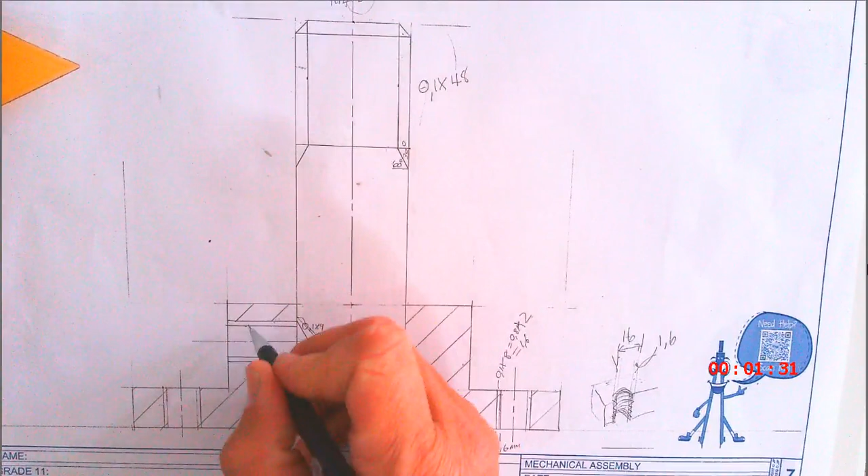This one, what was this one? Hy was M9, so this is M18. So this is going to be 1.8. And that one will also be 1.8 millimeters. Onthou julle, alles moet met 2 gemaal word, because we draw scale 2 to 1. So all the measurements have to be multiplied by 2. This is why the M24 is M48.

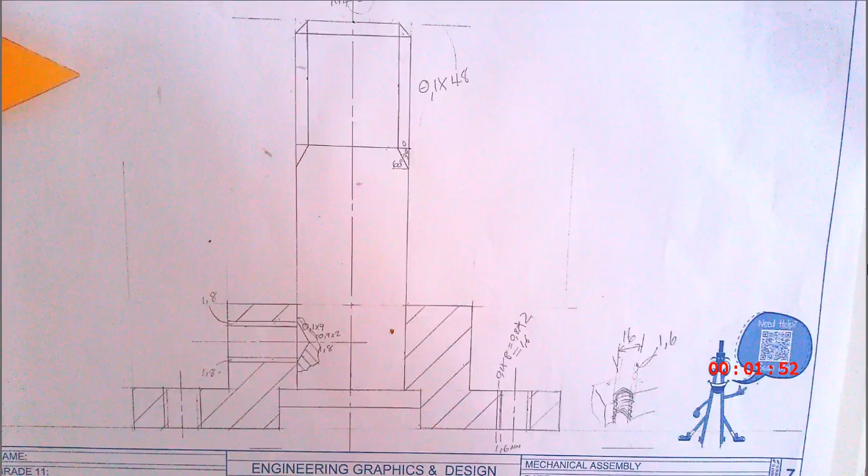There's a pulley, a washer, a nut, and a bush. Okay, now let's quickly talk about the bush. If you guys are going to be drawing the bush, 3-dimensional, it would look like this when you cut through it.

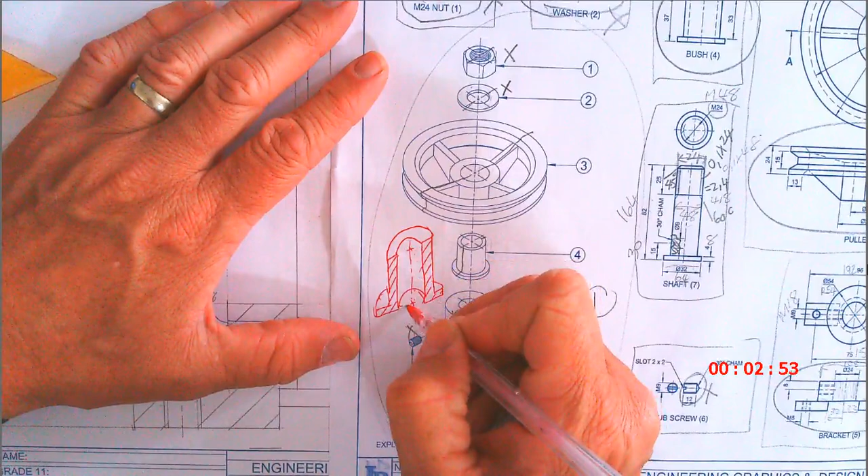So if you are looking from this side, what are you going to see? Kom ons kyk gou hierso. You guys look at this one. So I'm going to teach you how to do this. So if you cut through this thing, you're going to keep the outline. So it's going to look like this. Draw the outline, and the hidden lines there and there will become solid. You will hatch this part, you'll hatch that part, you will have a center line in the middle.

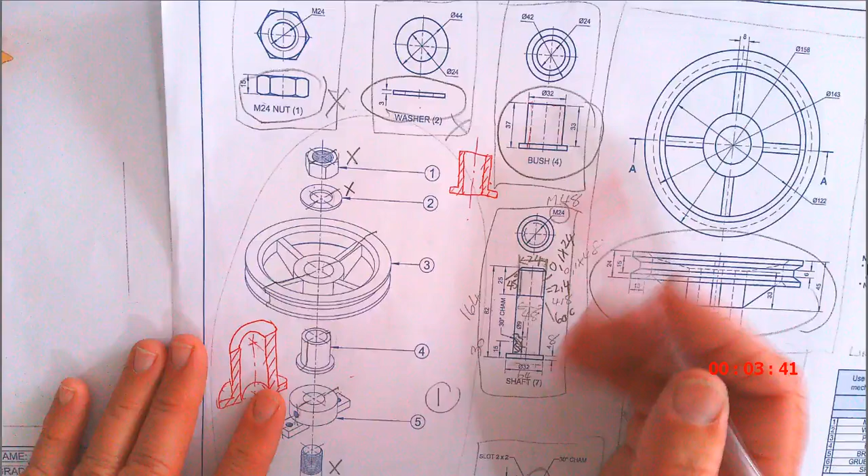Do you see this? It's the same thing. There's the gap in the middle, there's the one side, there's the other side. Okay, so a principle you can apply is keep the outline, hidden lines become solid lines. Okay, so daai bussie gaan ek volgende hier insit.

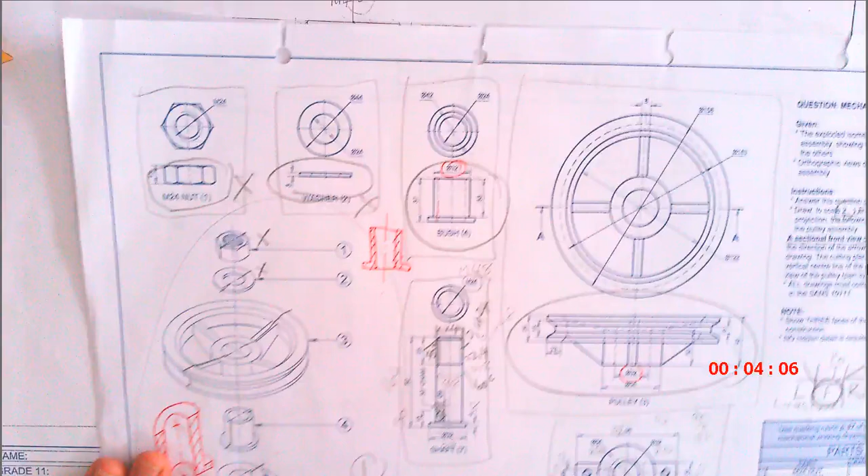If I have a look, I'll see that the measurement of that thing is 32 millimeters there, diameter 32, and if I have a look at the hole in the pulley, you will see the same measurement. Okay, so that diameter 32, that's the same size. We will see this is 45. So basically we're going to draw the pulley plus the bush, en daai randjie gaan daar uitstaan.

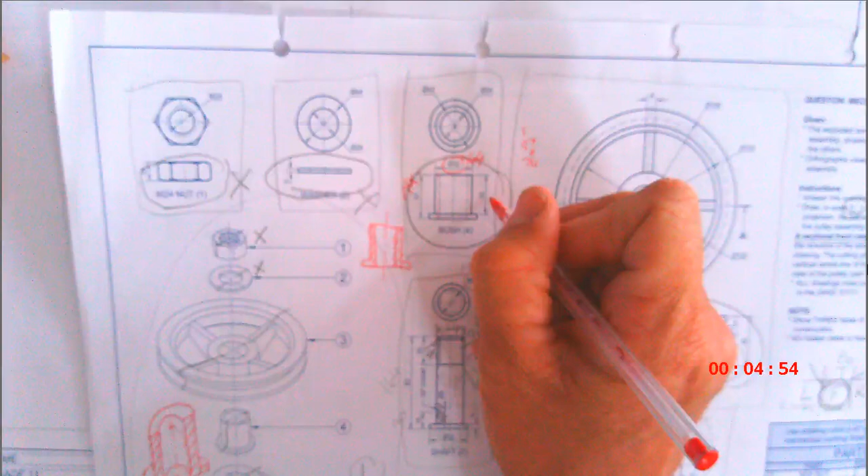Okay, so the next thing I'm going to draw quickly with you guys is the bush. The 37 will become 60 plus 14, so that's 74, is ek reg? 37 maal 2, 2 maal 7 is 14, 2 maal 3 is 6, so this is going to be 74, that is going to be 64, this is going to be 66, and that's going to be diameter 48, and this one is going to be diameter 84.

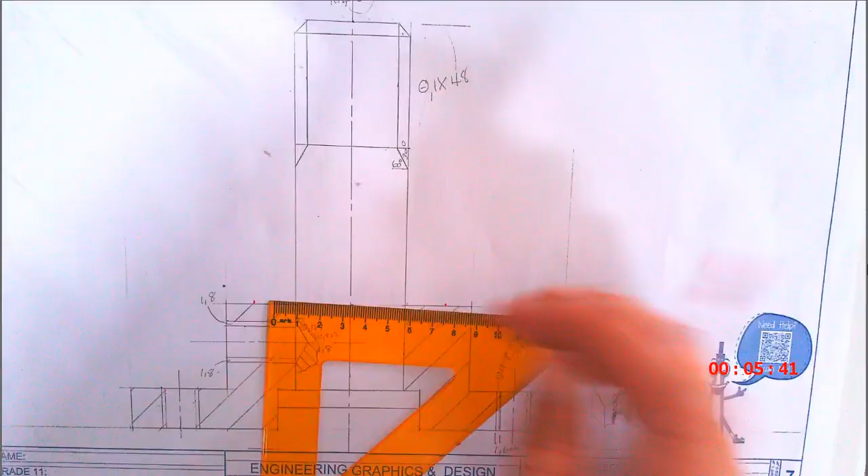So I'm going to start here with the 82 here at the bottom. So this one is going to be 82. So I'm going to use a different color now. I'm just going to draw in pen. Don't draw in pen, please. This is just to help you. 42. Then let's see what its height is. To find out the height, this is 33 and 37, 4 millimeters difference. So that space is going to be double that. That's going to be 8. That space there. Okay, so it's going to be 8 millimeters.

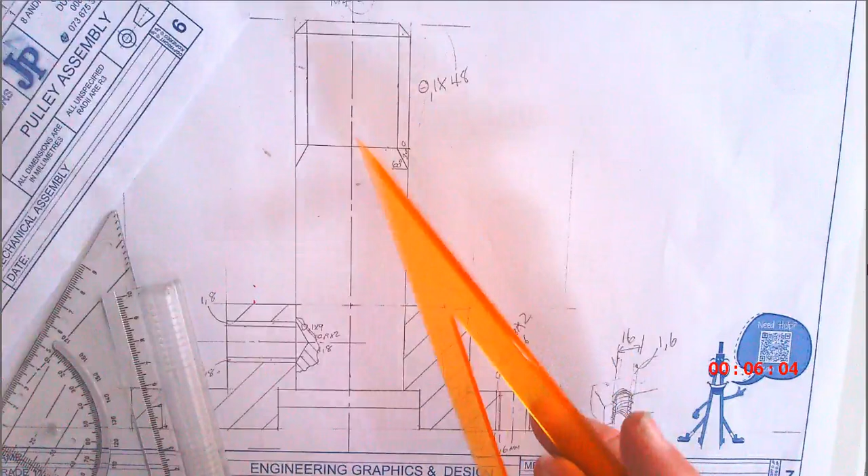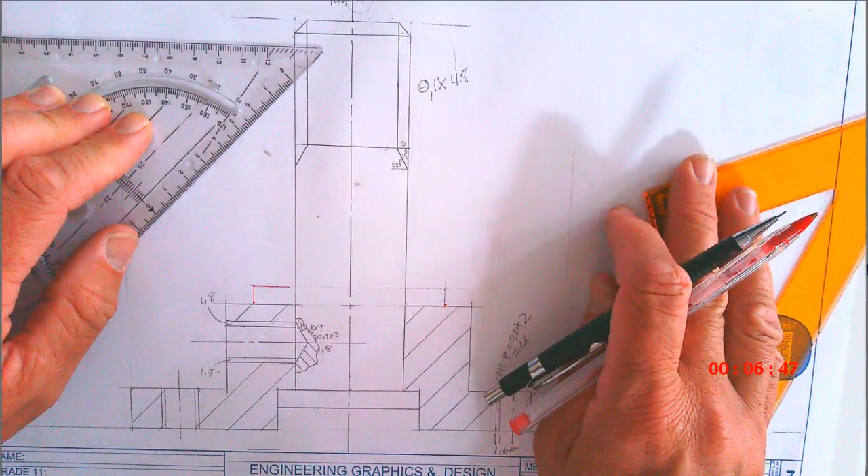Okay, but now there is a thing we have to remember here. I'm just going to make some construction lines first. Okay, and the width is 64, so that's 32. So from the center 32, and this side is going to be 64 from that side to that side. Its height is 74 high.

There's no line there. And okay, hoekom het ek hier, why don't I have other lines here? So I don't have a line going through here. Hoekom sal ek hier 'n lyntjie hier nie? Ja, opgou vir my. Why don't I have a line going straight through here?

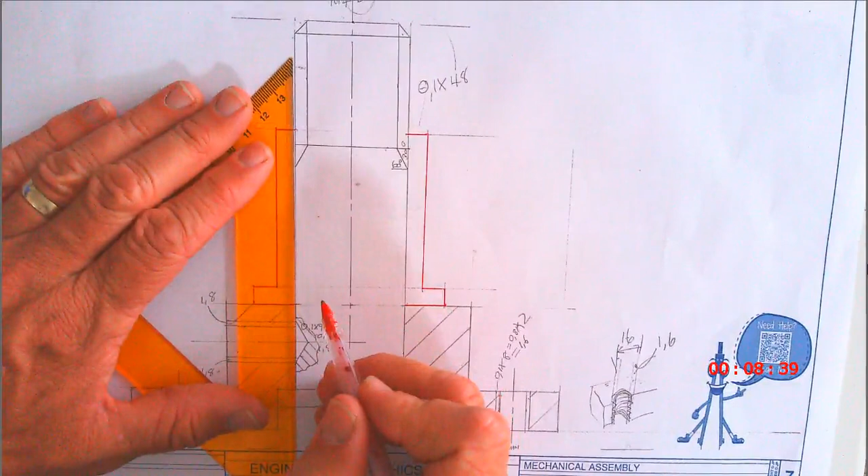So we don't section this one, and you have the main part, you have this thing, and then you've got this bolt going through, and the bolt covers up everything that's lying behind it.

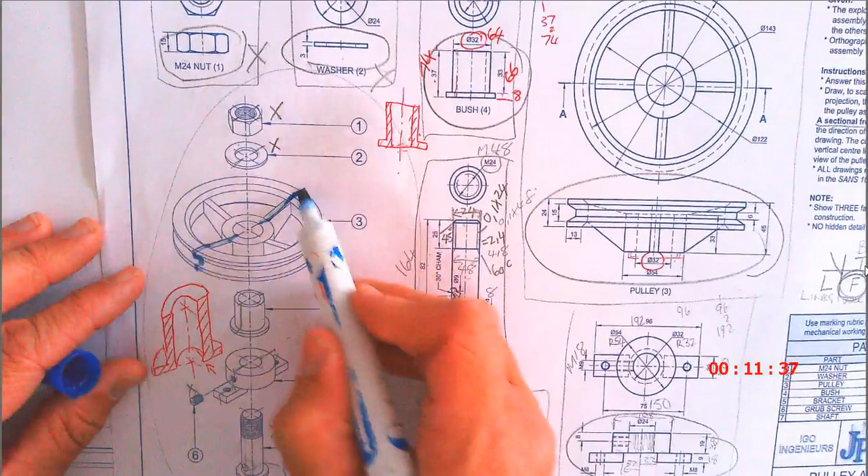And so all the lines that you see here will be visible on your drawing. That one, this one. You can have a section here, you can have that part there. Ja, jy gaan al daai sien, daai agterste lyntjie tot daar, van daai web, you're going to see the webs there.

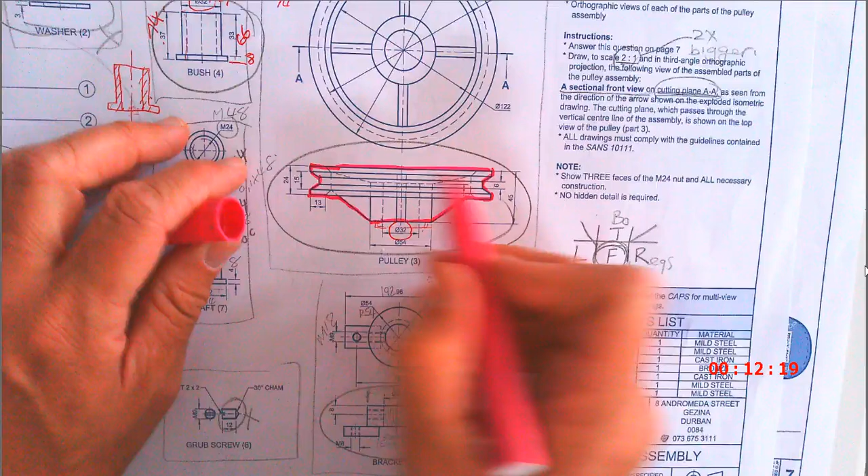The hidden lines normally become solid lines, daar en daar, daar en daar.

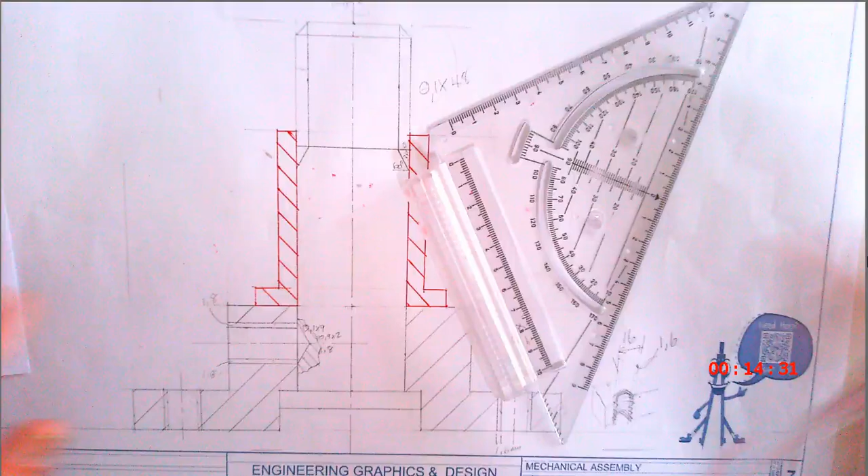It's going to be, hy gaan wees 90. That's going to become 12. This is going to become 108. That's going to become 64.

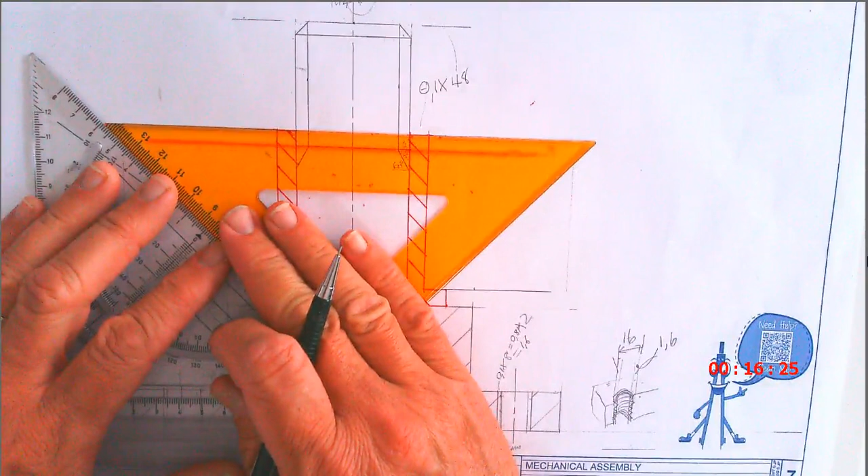Don't just sit and look. You can draw in class and you save some time.

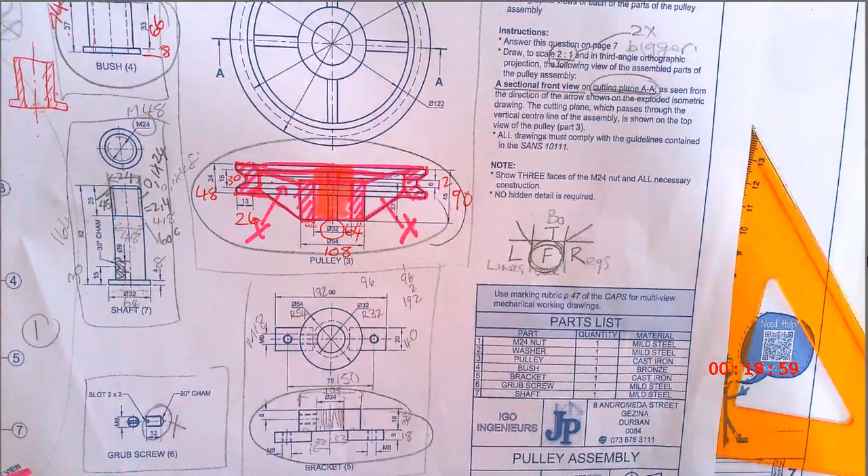This must be 4,5. Normal measurement, this is 4,5. So that's going to become 9 if you times it by 2. And 9. So 48 plus 30. 48 plus 30 plus 18. Let's see what that gives us. 96. Sorry, I shouldn't add those. Yeah, so I should actually only be adding the 30 plus the 18 and that is 48.

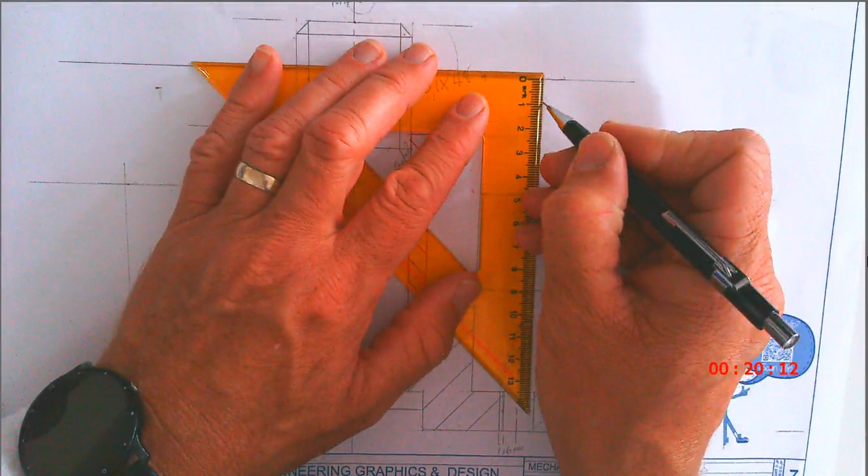Sorry, ignore that. So it gaan wees 9 en 9. So from this line, it's going to be 9 millimeters. 9 mm die kant. En net gou vir my konstruksielyntjie in, so I'm just going to put in a construction line there. Dan die gappie is 30, it's going to be a 30 mm gap. 30 mm, this one is also 30.

1, that's 100. 158, so another, that's 158 is there. Hierdie kant is 100, 100. Sorry, 100 from the center. And another 58. 158. So it's going to end over here.

We're going to have a vertical line there. En maar 'n bietjie konstruksie gou doen hierso. I'm going to do a few construction lines.

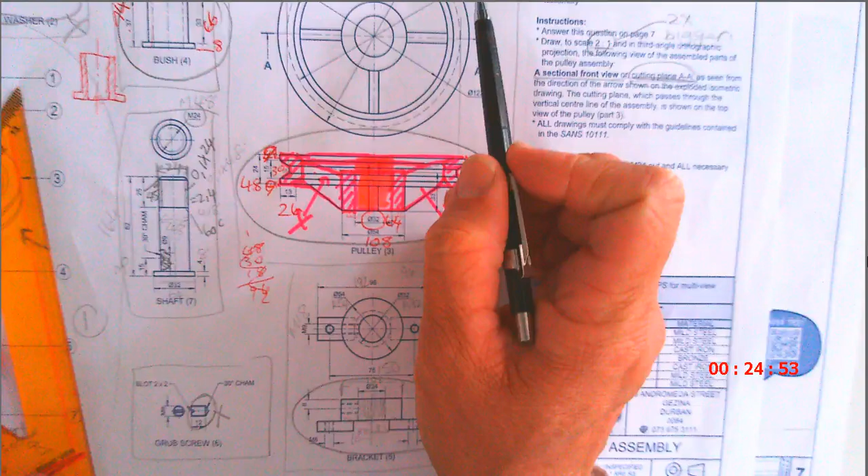So 143 from the middle to the sides. So 130, 140, 1, 2, 3. Also, hierso is 140, 1, 2, 3, 143 daar.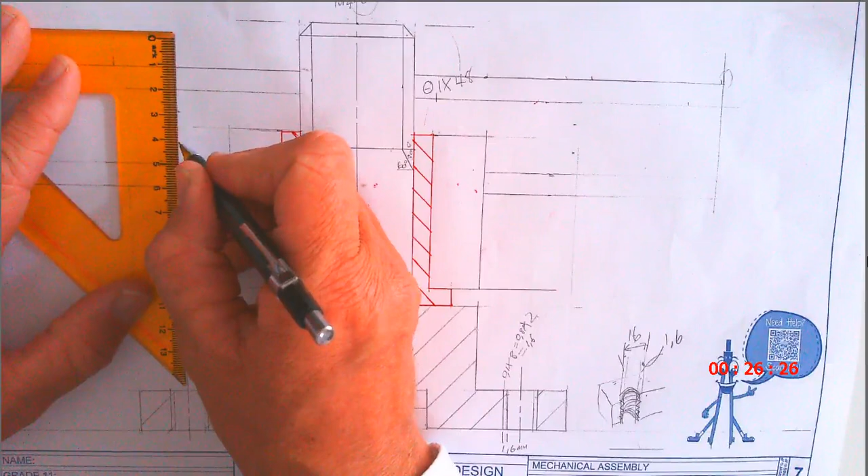Ook 9 mil, so it's going to be 9 millimeters down, like the previous one. So another 9 millimeters down to this point. Nog van hier af 9 millimeter op. Selfde aan die ander kant, 9 op en 9 af, so it's going to be 9 millimeters there, up to there is 9. Right, kom ons trek vir daai lyntjies gou deur.

I want you guys to be finished for tomorrow up to here.